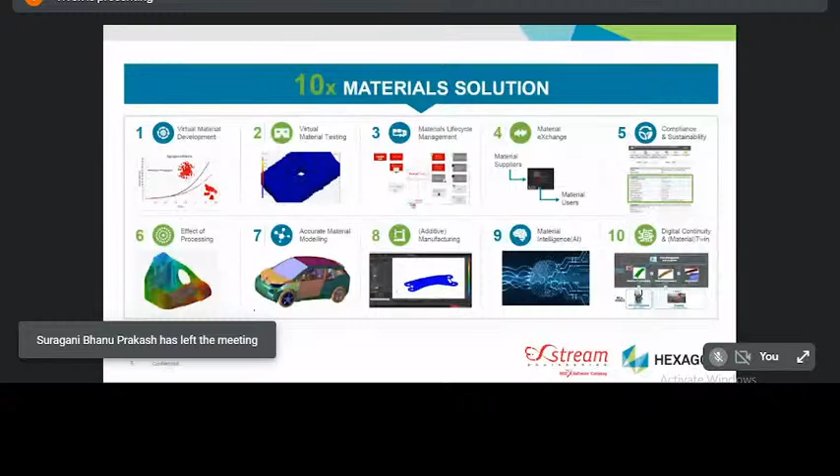So this will help the aerospace companies to reduce the amount of coupon testing. They need not test for all the required configurations. Most of it they can do by the software. Then a few critical configurations they can test on the actual machines. This helps a lot in saving time and cost in the material testing for aerospace programs.

For this also a few slides are there. These are all available ready-made. I will show it in the demo also, shortly. Then the third aspect is called materials lifecycle management.

What we mean by this is, if you take a large automotive company, they may have hundreds and thousands of materials that they will be using in various components. In the BIW, some material, in the tire, some material will go, in the engine, some material will go, in the rubber bushing, some material will go. Now, all that has to be stored in a very systematic manner.

So ideally some kind of online portal where somebody will log in and say, which product do you want to design? Which material options are available? Which material do I use? And then it will tell, okay, use this particular stress strain curve. And then there is more to that. Where did that property come from? Because somebody will say, I took it from here and did the analysis.

Then the product might fail and it will turn out that maybe that data did not match the actual component being used. So it is very important to record, where is this data coming from? Did the company get it tested? Was there an in-house test done? If the test was done, what was the specimen used? What standard was followed for the testing?

How many specimens were tested? Is there a statistical average? Or if we have taken from a data handbook, which data handbook is it referred? Is that properly subscribed, and which volume is it available for reference? Which recent version of the data handbook? Maybe the data handbook people itself updated the data in one latest version.

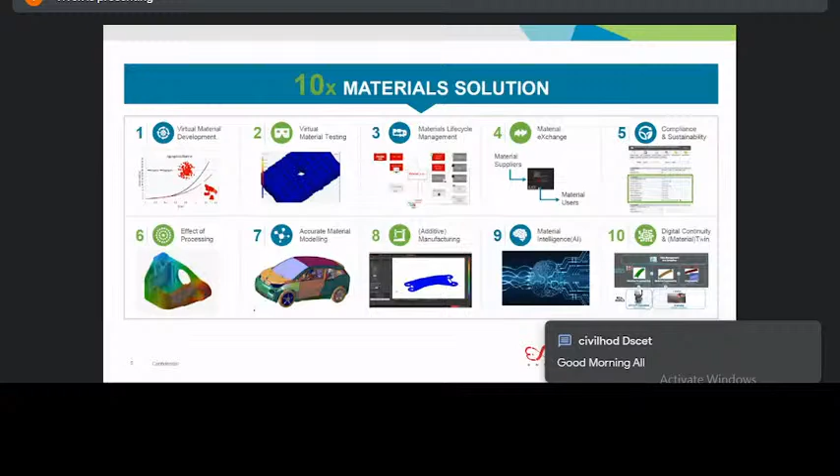They will seize all the shipment and say it cannot be used. And maybe they'll put a case against this company also, asking why you are shipping that, because it's a legal thing.

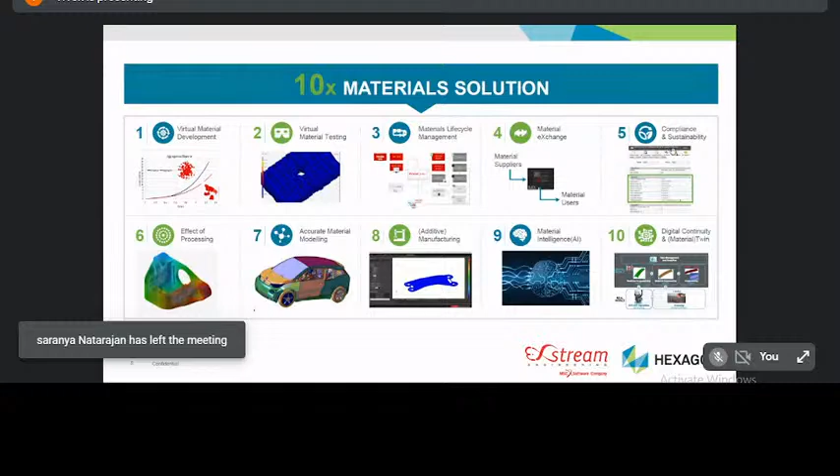So that compliance also can be addressed at the design stage itself, if we can say which product, which geography, which materials can be used. That is also available in the online systems which our company and other companies are developing for the end companies' usage basically.

Then effect of processing, like for example, if we take the case of injection molding, which is very common. There are several other processes similar to that, but this is a typical component. Hundreds and thousands of components we manufacture by injection molding, with several intricate shapes and designs.

Now, when we are doing that molding, the way the material flows inside the mold and then the way it solidifies has an influence on the end material properties that develop. Normally we will say, okay, this material means use this average property throughout the entire component. But that is not really the case.

Depending on how the mold is, somewhere it's very thin, somewhere it is not, some dead ends are there, some corners are there. There the flow will not happen fully in the other regions, and that has an influence on the properties getting developed in that region.

Maybe if there are some fibers, the fibers will orient in some manner in some direction, and in some other manner in some other direction. So this is, you can say, non-homogeneous and anisotropic.

Non-homogeneous means the mold flow itself is not happening smoothly everywhere. On top of it, it is anisotropic - if some fibers are there, depending on that flow, the fibers get oriented.

How do we account for this? What we do is like this: there are some simulation software which will simulate the injection molding process itself. There is a product called, for example, Moldflow. There are several other products which will say, given the die and the mold, and the material you are manufacturing by injection molding processing.

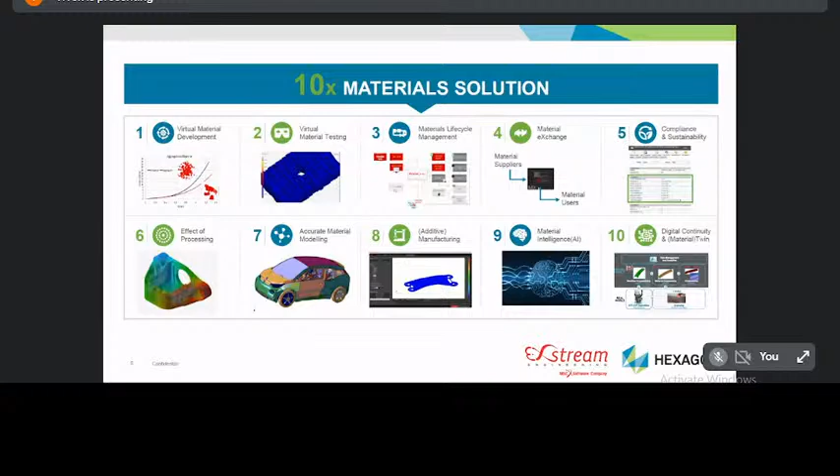Do you have any questions so far? More or less on the same things, I will be showing several use cases, examples, projects, etc. I will be showing these. If anybody has any questions, you can ask.

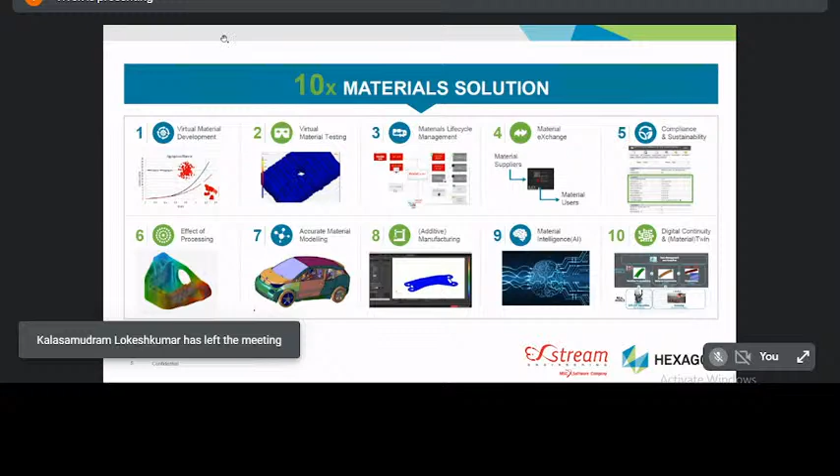Sorry, is it the free version or the paid version? That's a good question. We are providing both actually.

So if you see our website, this is our website. You can just type mscsoftware.com. You will see our website here. In this, there are a lot of products involved. Can you able to see my screen? Can one of you confirm? Oh, it's showing off. Are you able to see my screen? No sir, it's showing off. One minute, let me check that sharing once again. Where is that? That is here.

Now are you able to see? Yes sir, we can able to see now. Okay, so this is our website, mscsoftware.com. Easy to remember and type.

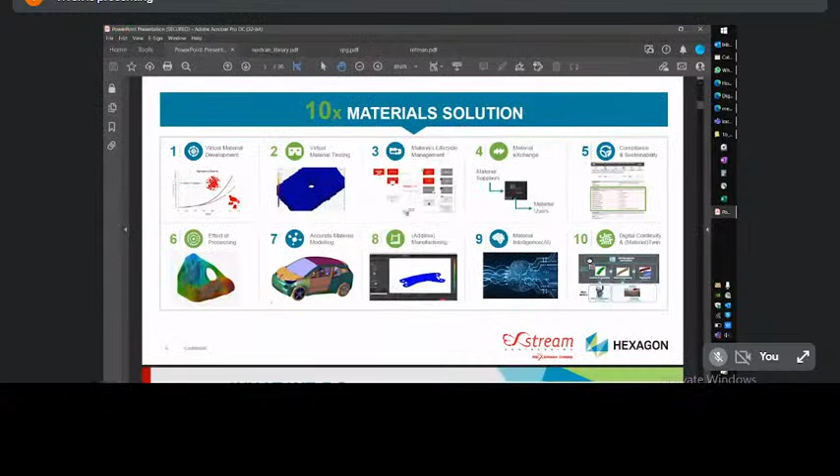Okay, I will continue further. So next is basically an elaboration on all these things for maybe another 5-10 minutes. By then my colleague Dr. Harish will be joining, and he will be demonstrating the actual product. Let me check once in case he has not. Okay, no problem. I will alert as soon as he joins.

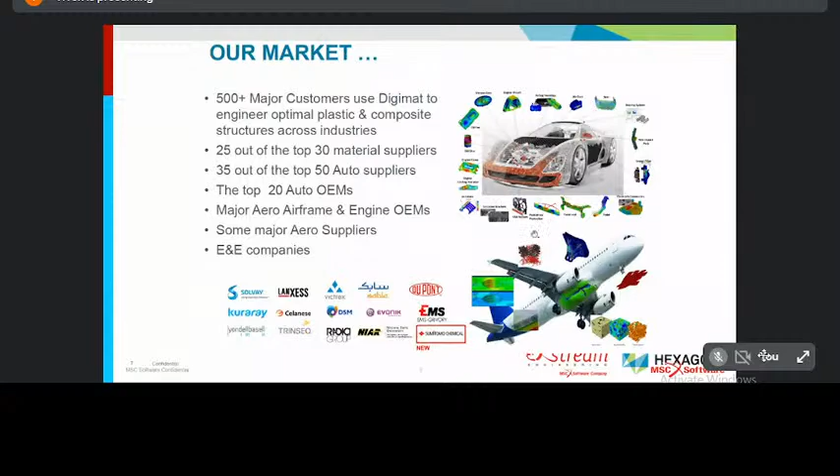And here we are giving some view. If we take a car, many parts of the car have composite materials, and there is scope to use this kind of technology to design the correct material properties for all of these applications.

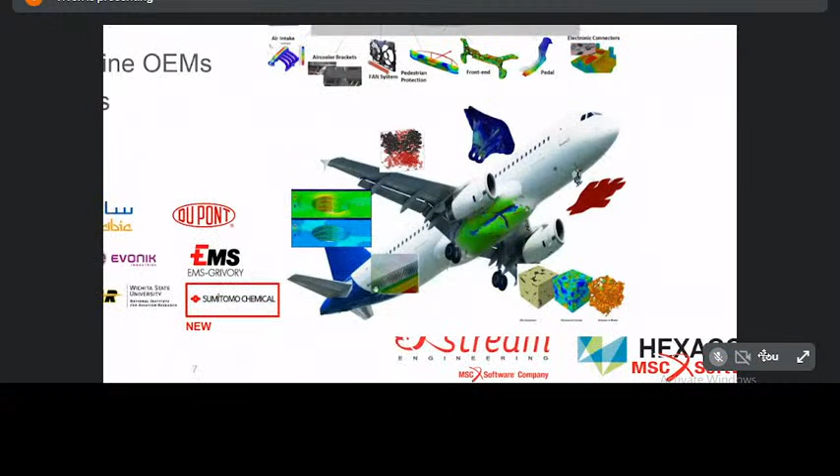It is being used on a day-to-day basis like that. Similarly, if we say aircraft, so many parts of the aircraft are on composites, and these technologies are used to predict the properties for a lot of these components and subsystems.

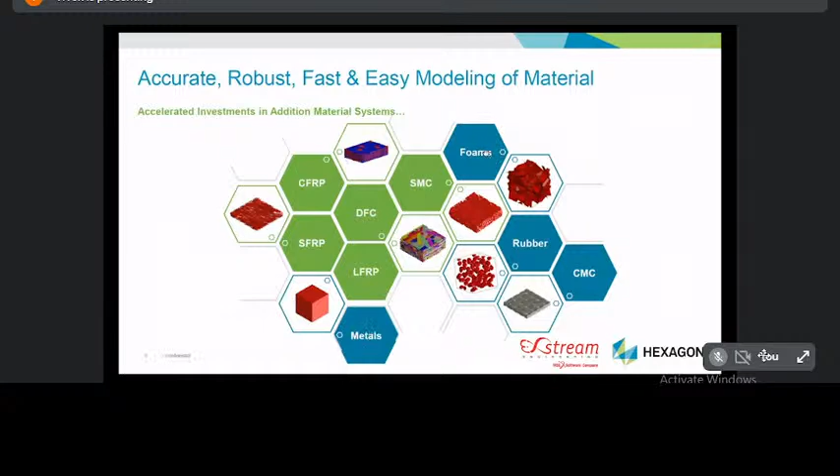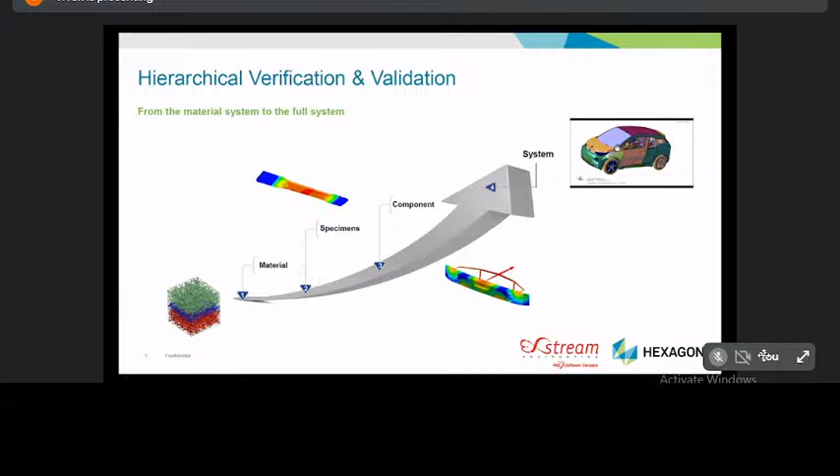Okay, again some general view of the same thing. Some material: CFRP, SFRP, DFC, sheet molding compound we say. SMC is another interesting type of material which is widely used. Metals also we can do. Then foams, rubber, and so on. All these materials can be worked on or designed. And so we start from the material and then use that material property with specimens first to verify how it is working. Then finally we will apply it on the full end component.

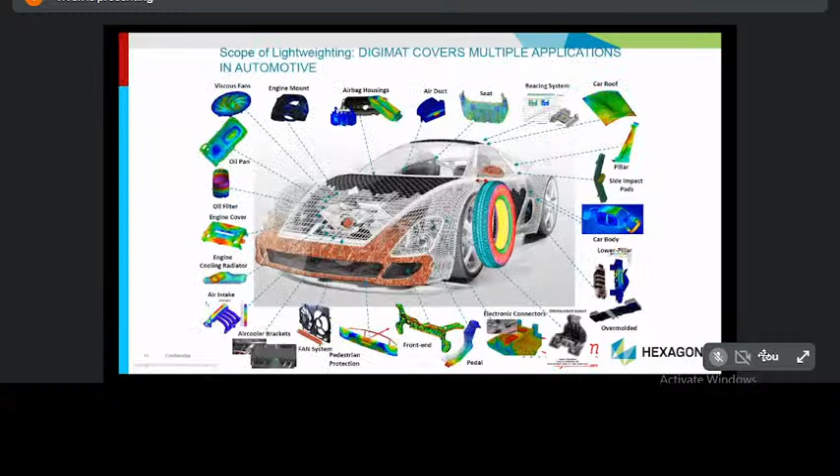And again, these are just general slides. I will skip further. This is the same thing, whatever I showed earlier, more zoomed in view. This whole presentation I will be sharing with you as a PDF. Today evening I'll share, and then Dr. Raja Reddy can get it sent to you.

Otherwise, normally what we do is we assume some average behavior everywhere, but the material is actually behaving differently. So if you say this is some yield or this is some ultimate, you can see a lot of variation is there. This we are accounting for in this multi-scale material modeling process. So same thing: the manufacturing process, then we import the manufacturing process detail. Then with a tool like Digimat, we calculate the different stress strain curves, and then the final performance using the appropriate data.

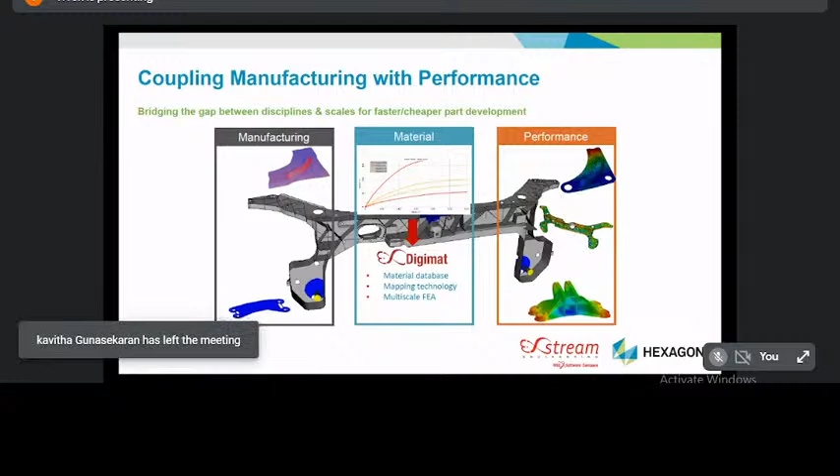Okay, again, some more details. So I said process, but it is not just injection molding. So many processes are there. These are some of the software used. For example, metal forming could be there. We have Aniform, then Magma. So many tools are simulating so many processes.

For example, we even have some scanning processes. That means I take some component and I will do a scan of it, like an X-ray. Now imagine you take an X-ray of multiple sections of that component. This is an industrial scan, which is much more accurate. It will take those multiple cross sections, put them together and create a 3D geometry, a 3D representation of what is inside as well. Whatever void is there, whatever orientation is there, it will capture that.

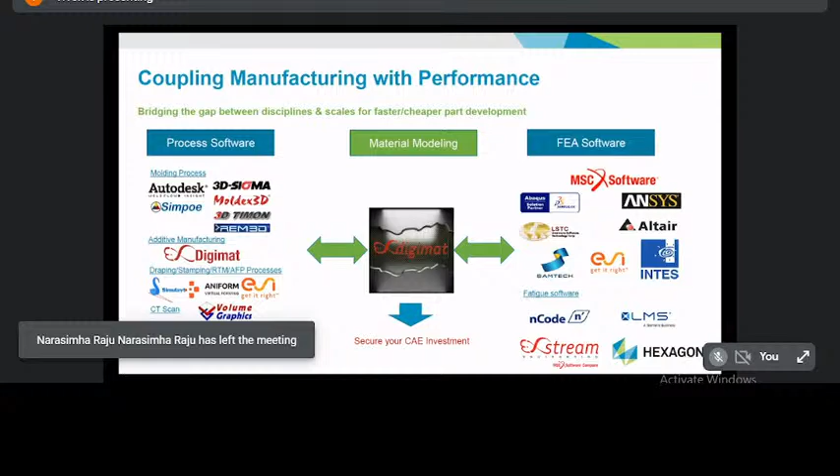That kind of data, again, a tool like Digimat can read, and it will calculate the property based on the specific imperfections or whatever fiber is there. That kind of thing is also available. So practically from a wide range of simulations, we can read in the data and account for the correct variation of material properties. It is no longer just one Young's modulus, one Poisson's ratio. It is now varying from position to position depending on whatever process that thing

has undergone. We calculate all that, then we map that onto practically any software. This technology as such is independent of software. We can use whichever process simulation software we have, and whichever simulation software you have. These are most of the available solutions in industry.

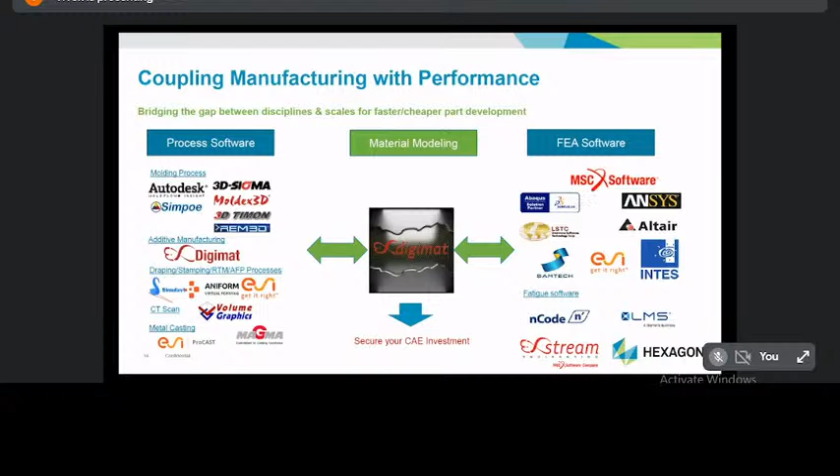This tool like Digimat will map the process from any process simulation to any finite element analysis software, and we can do the further analysis. This kind of technology is available and being used in the industry. Again, same thing, we will elaborate on that.

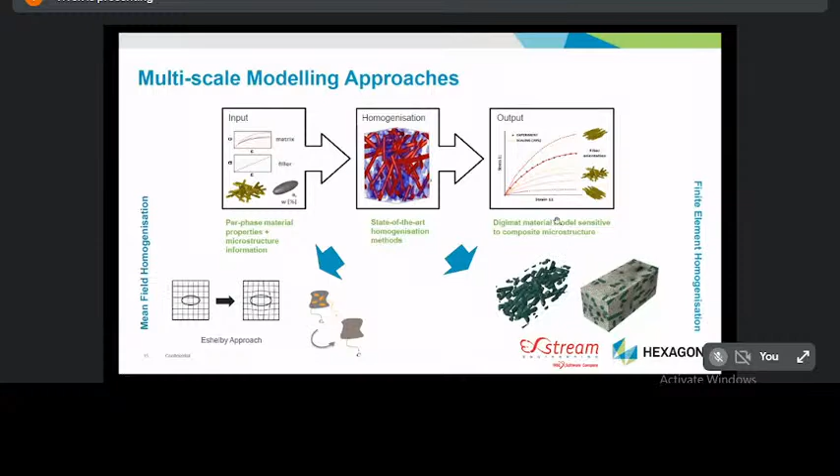So you could have the matrix, you could have the filler material, and then the orientation, and then we have things like volume fraction and so on. With the different combinations of this, there are homogenization methods, different equations are available. Then it will predict that if the fiber orientation is like this, this is the property. So depending on the fiber orientation, you will get some appropriate property. We can visualize this, and this will get mapped onto the structure.

Calibration we can do. Whatever we predict, what is the guarantee that it is working correctly? One specimen you simulate with all this technology. Then you simply take one actual specimen made by that same process and do the testing. Then compare those two. Plenty of comparisons we have done, which is verification that this whole method is working.

And so these are the kind of software. If you open the software, you will see that so many materials are there. A wide variety of industrial materials and configurations. We have the data for all this. These are the individual constituents. This is when we say short chopped fiber. So many types of fibers we have the property for, practically.

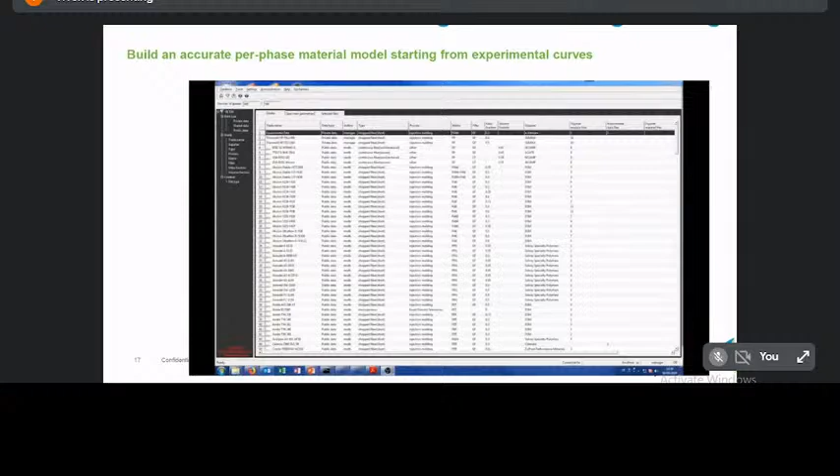We have tied up with practically all of the material manufacturers. So we know that if they say chopped fiber, they will be using one of these only. So it will take the property from here. All we need to know is the volume fraction, the orientation, like that. Then it will put together and calculate the global property. So the experimental curve of each of these individual constituents is available inside the software for the end user.

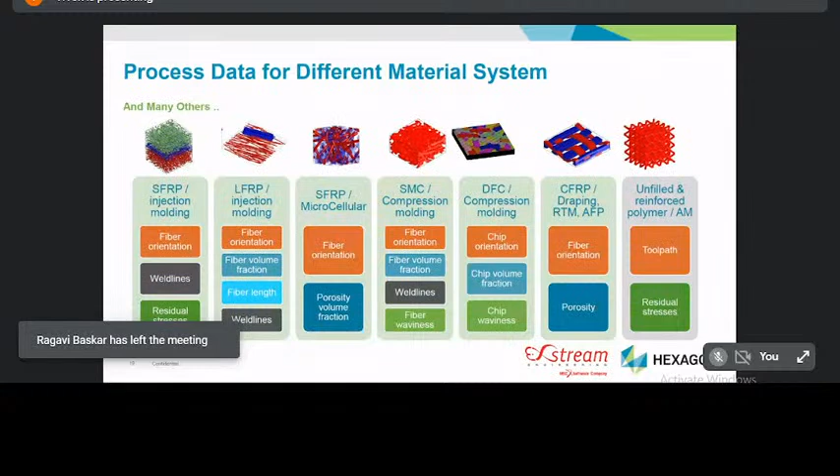So again, just to mention, so many types of things are available. For all these kinds of material, knowing the micro property and accounting for residual stress, weld line, fiber length, porosity, we can predict the end macro property that component will have and use that property in the final simulation or design, so that our simulation is correct and more realistic.

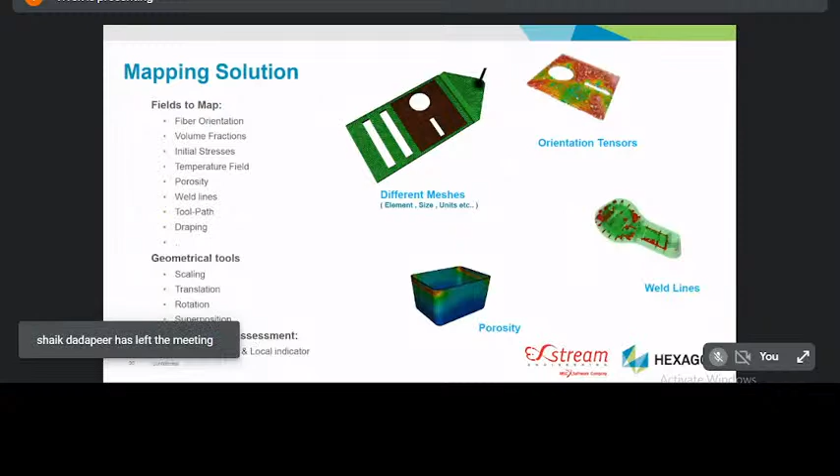Mapping solution. Mapping means from the molding onto the mesh, because the mold flow or injection molding simulation wants the mesh in some manner, and our finite element stress analysis has the mesh in some other manner. Sometimes something is in 2D, sometimes in 3D. The region of space will be the same, but the meshes will be different. Sometimes units may be different. But in spite of all this, we should properly transfer the material information from one mesh to the other. That is called the mapping solution, which we are able to do.

Just give me a minute.

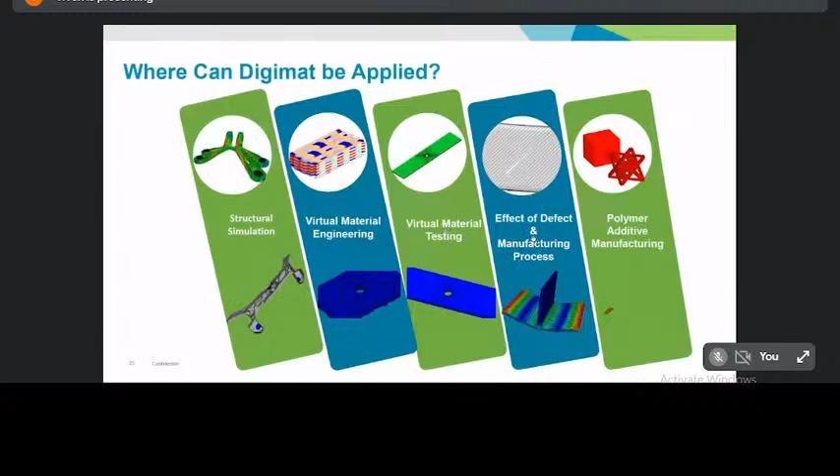Okay, sorry, continue. So this is again the same view of multi-scale modeling. At each of these places, there is a different orientation, different stress-strain curves. And so structural simulation, virtual material testing, effect of the defects and manufacturing process, additive manufacturing, these kinds of things.

And now some industries where they have actually used it day to day in India and globally, we are showcasing that. So Faurecia company, they manufacture several kinds of components. In India, they have multiple design centers, engineering centers. They work with Solvay. So usually there is an end component or end system designer, and then there is the material supplier.

They always work together within this technology. So they work with Solvay, and they have used it for several applications. Some of them you can see here, injection molded composites. Finally, the aim is 30 to 50% weight saving.

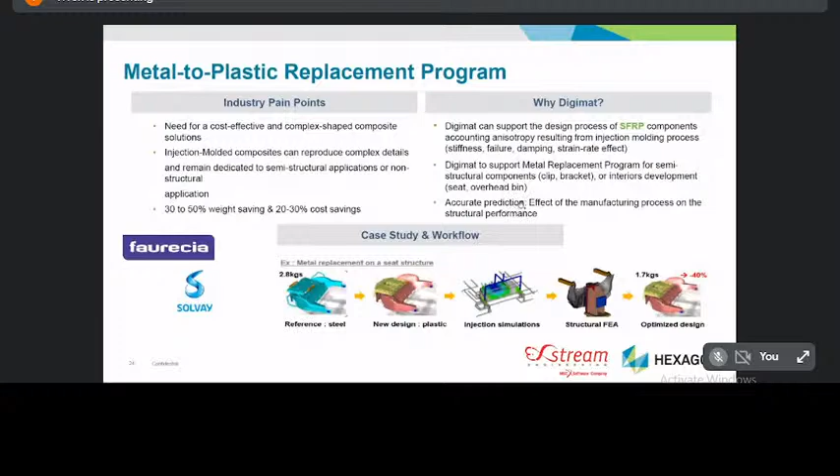And our simulation is much more realistic. So we thought it would behave something like that, but now it is behaving like something else. We are able to do the accurate prediction. Okay, this is one of the main aspects of it. So for example, Faurecia seating systems is there. That is one of their units. So whatever you can say, the metal to plastic replacement, we say. When we say plastic, we mean composite material.

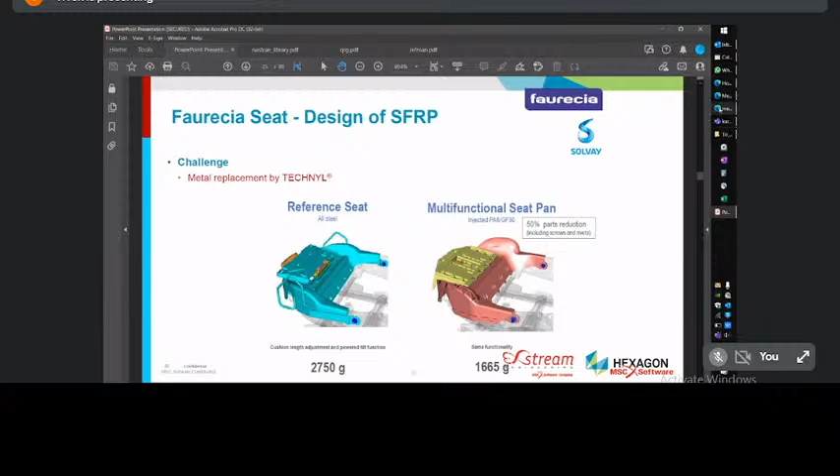Okay, so this particular component, just give me a minute. Just give me 1 minute. One call is coming. I'll just check what that is. Problem? Yeah, sorry, I'm back. Sorry. So, okay, sure, so we continue.

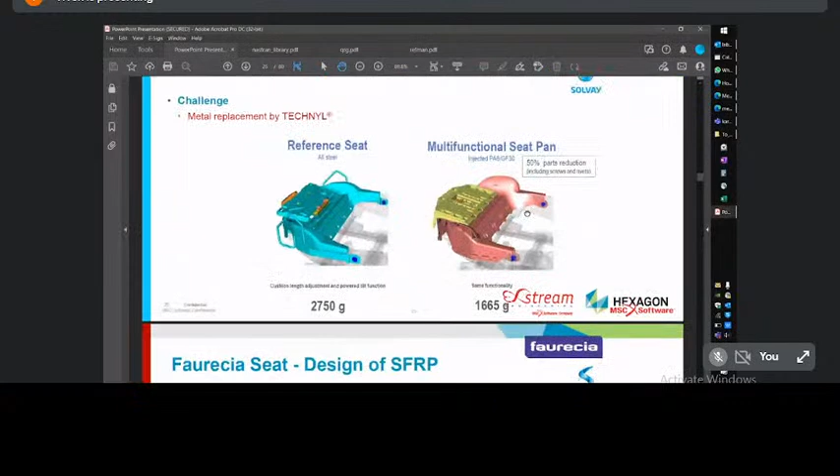So these are like the metal to... okay, these are now 1.66 kg, and metal is also being avoided. Okay, and they are simplifying the design also. When they do the injection molded part, you can combine multiple parts to get one integrated part. Okay, so the assembly also becomes simpler, like a 50% part reduction. All these are sort of done together.

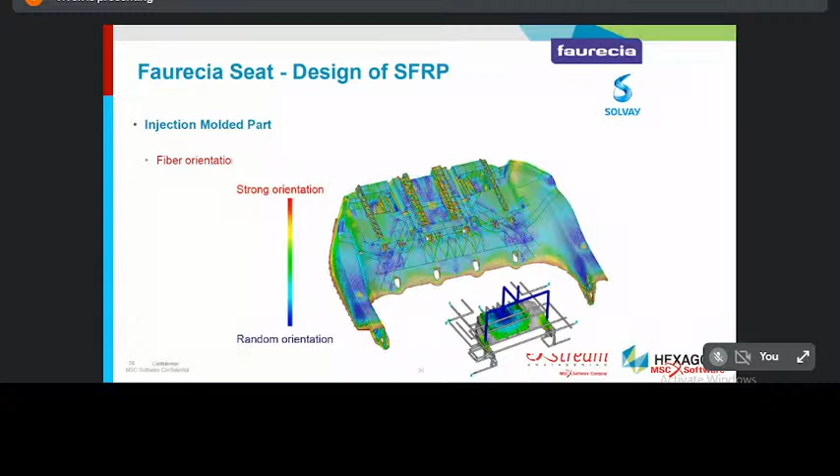And now the main thing is which material you can use for this, so that it will have the same strength as that of the original part. Okay, so that is what is being done here. Several views of that. When we do the analysis, this is the orientation of the fiber. Some places it is randomly oriented, some places it has strong directionality. This depends on the process parameters. We are simply reading from the process, then calculating the correct material properties and using them in the design.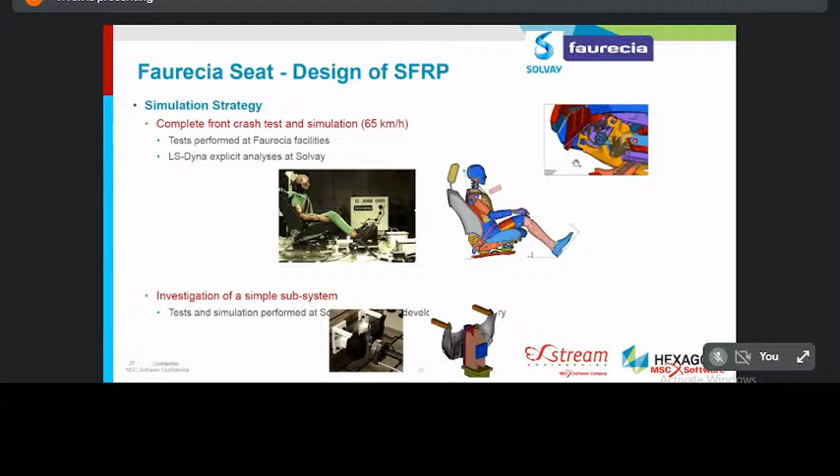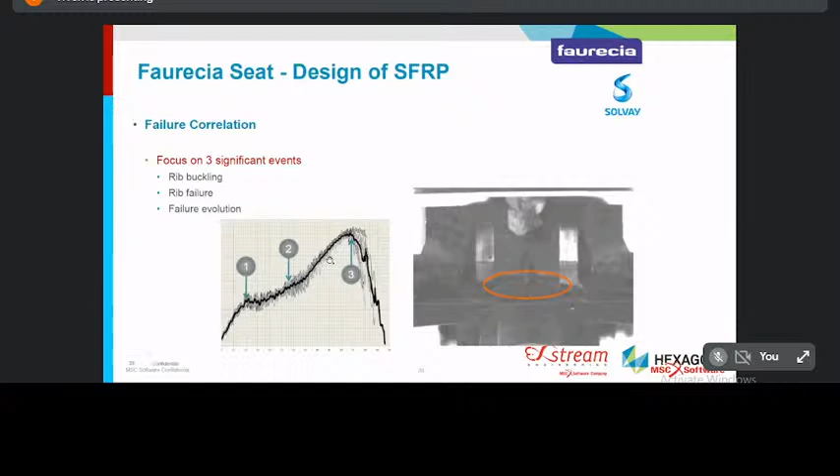And so here again several things. For example, these kinds of systems here, which are holding these seats and so on. You can see the part shown here. So correlation with the test. Finally, they will do the test, some load versus deflection or stress strain, they will match and say that it is matching well, which means this whole process is working okay. Those kinds of verifications are available.

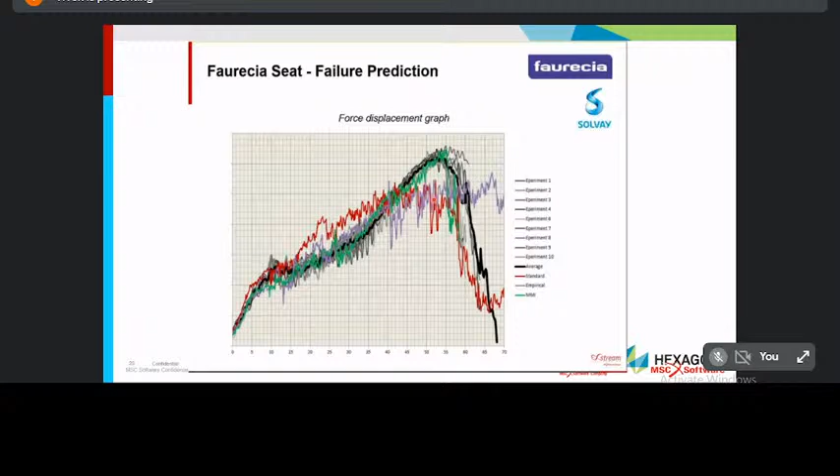This is again multiple experiments they have done, force versus deflection. So these are verifications. You do a test, you see the force versus deflection. And similarly, reinforced plastic. For example, this Valeo company has done that, in the case of this vehicle engine cooling radiator. So this part, they are making with this composite material, and ensuring that it is working okay.

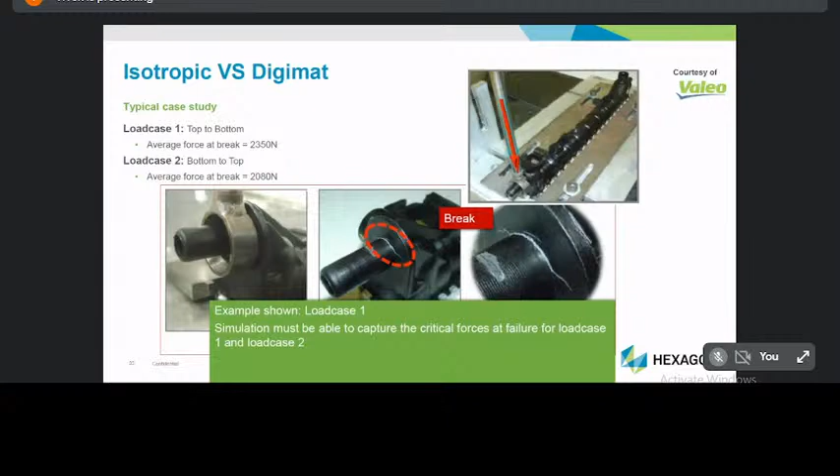So isotropic versus Digimat. Normally they will assume that it is an isotropic property and they will do the design. Then it turned out that it was failing, because that part was not actually behaving like an isotropic material. Then they did all these simulations of the material properties, got the updated properties, accounting for all these aspects which I am telling, and with the updated material property it is working properly.

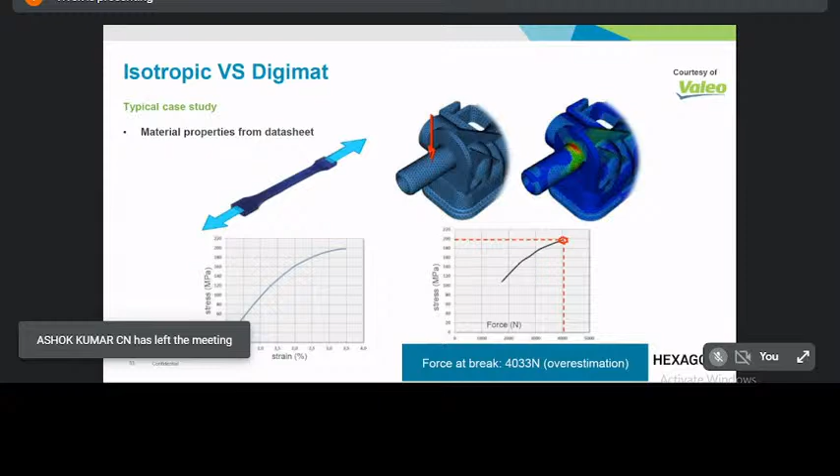So earlier they took the assumption of isotropic property, did the analysis, and the design was not working. With updated properties coming from this multiscale modeling, accounting for the orientation, the distribution, etc., we get a different material property. With that, the component is now working and not breaking. This is the company reference from Valeo. Valeo is again in Chennai.

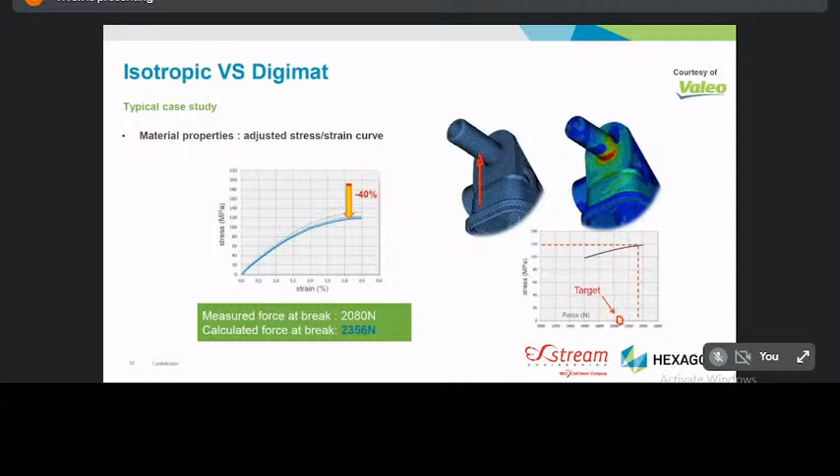They have got large engineering centers doing mechanical engineering work, and they are using technology like this. So they are comparing that. What does isotropic mean? It is an assumed value, and then with this materials engineering, we get the better behavior.

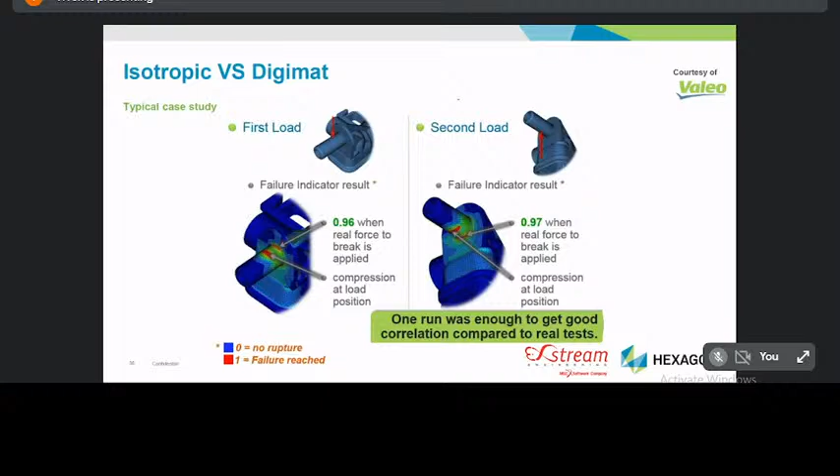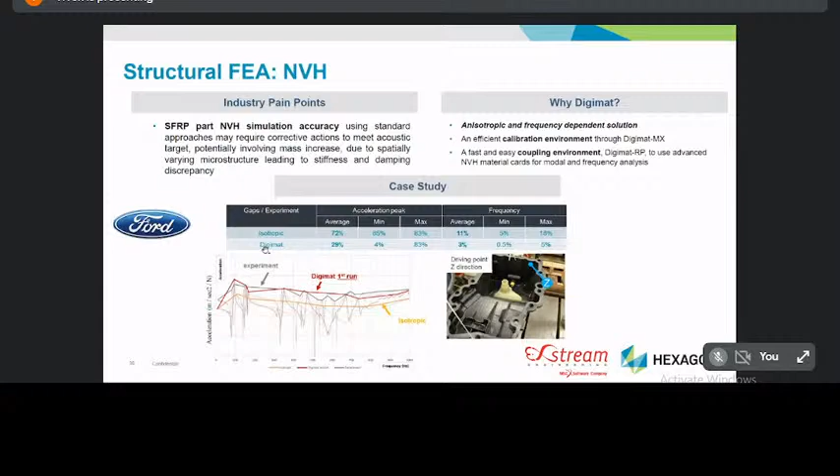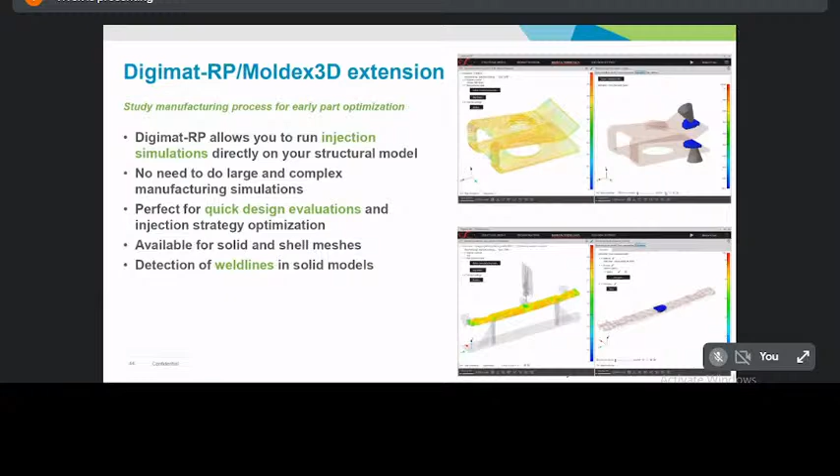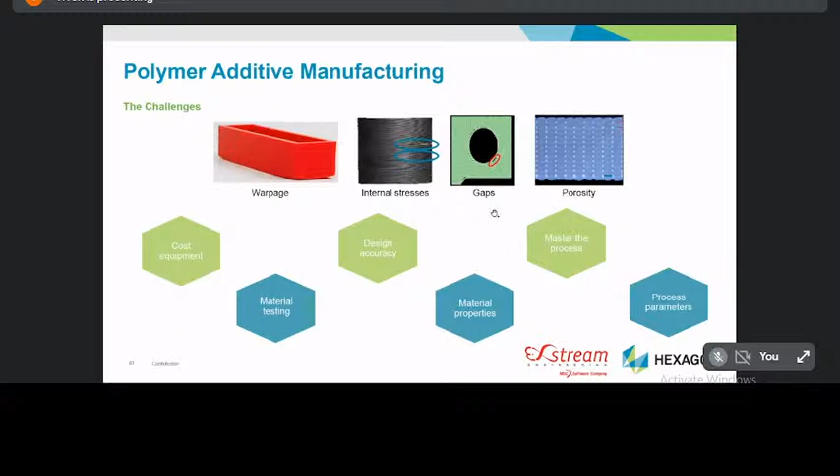So this is for additive manufacturing, like I was telling. So why is additive manufacturing simulation important? Because there will be warpage, there will be internal stresses, there could be some gaps, there could be porosity. We have to account for all these things in the material behavior. One is the additive manufacturing process parameters themselves. Apart from that, we should choose the material suitably so that all these challenges and defects are minimized. For that, we are able to design a better material. This material will go into the 3D printing simulation, and then we verify that the process is happening properly.

We are working with others; Stratasys, for example, is one 3D printing company. Then Bosch, DSM, all these companies are using 3D printing and these kinds of technologies. You can see here, and Harish will cover this further. FFF and SLS are different processes. For example, we can do topology optimization, although it is not directly material.

In additive manufacturing, there is now no constraint on the shape. Earlier, if you had to cast or extrude, the shapes had to be particular shapes. You could not manufacture arbitrary shapes. But now with 3D printing, practically anything can be printed, with suitable support structures. So optimization can now go to arbitrary and even weird shapes, and it will still work and can be printed. So topology optimization is a big thing. Then fiber orientation, process simulation, part performance, and part inspection. We are offering the methodology for those kinds of things.

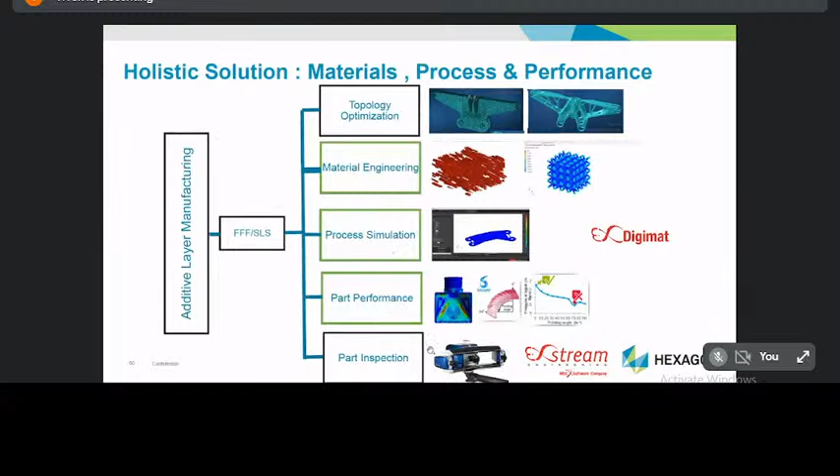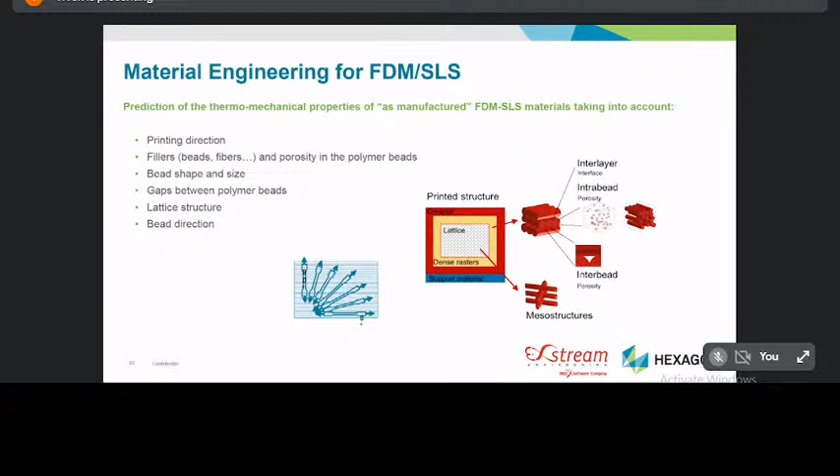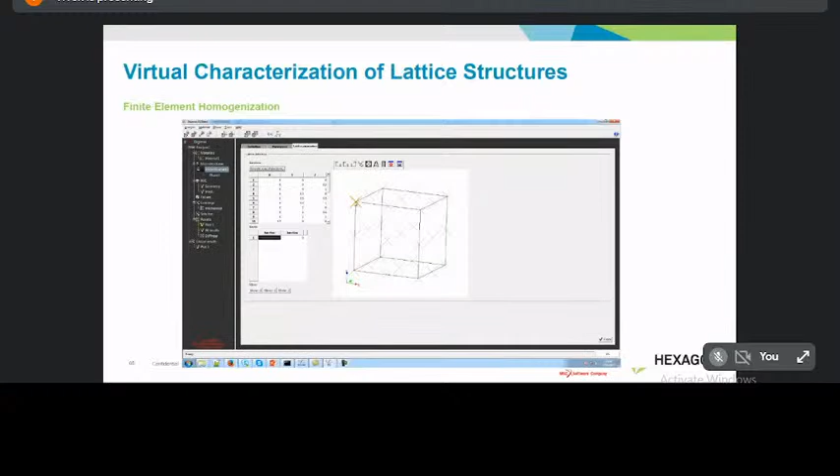Again, a reiteration of the same things we do. Which are the types? For example, FDM, SLS; for more and more processes we are able to define the material characteristics. Then, for example, visualize. These are some more screenshots of the software. We can visualize these lattice structures. Then virtual testing, like coupon testing, we can do.

Now these are the materials used in 3D printing. We are getting that data directly from the material suppliers. This is still from 2019; now we have much more. Solvay is a company which develops materials for 3D printing. Those characteristics are in our software, so you can use them in the simulation and ensure the design is correct. That means we know the property at the end of 3D printing if you use this material, and you can calculate and simulate from that.

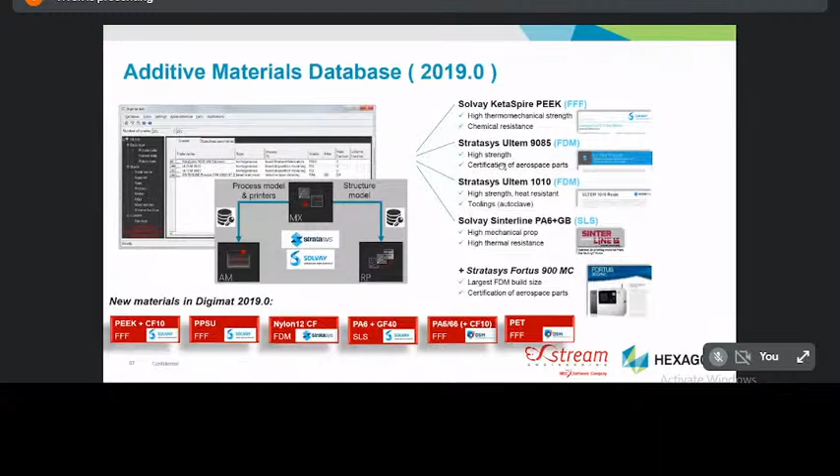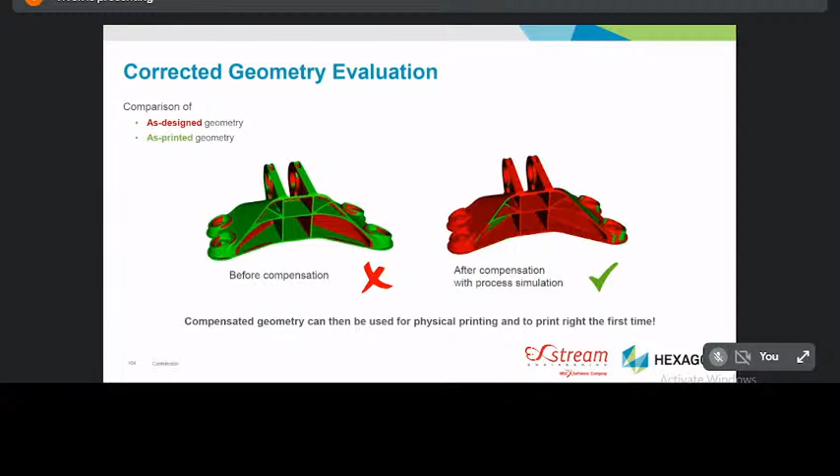Again, for example, effects of warpage and warpage evolution. Here there is something called the compensatory offset. Because of the 3D printing process, some warpage will happen. So we make our initial shape with a slight curvature in the opposite direction, so that after the warpage actually happens, you get the correct shape. That is called the compensatory offset. Those kinds of things we can design and account for. There are several examples of that.

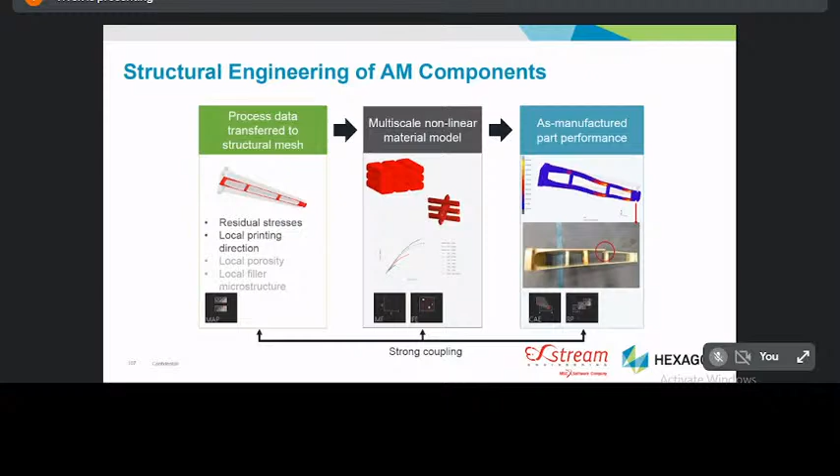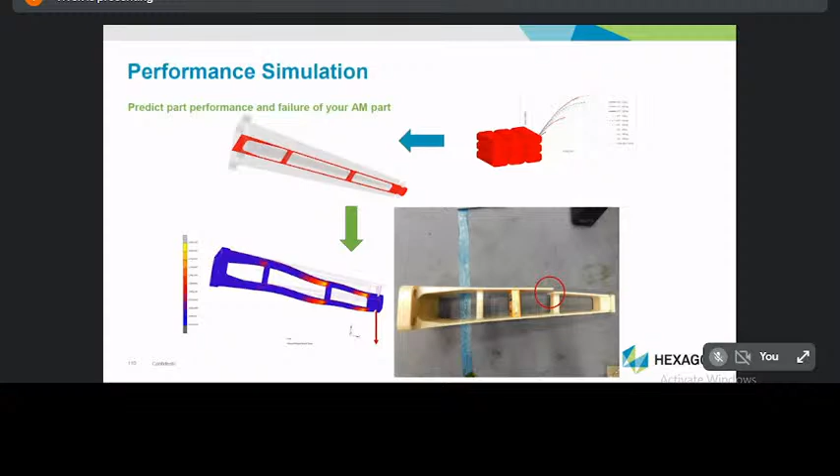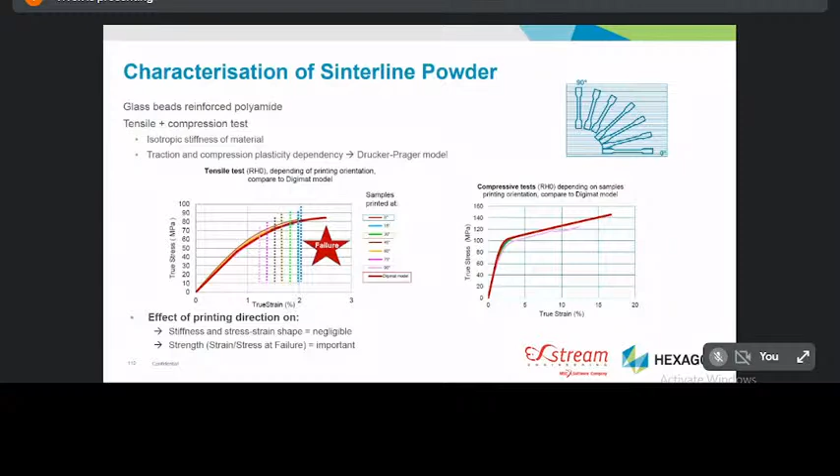And again, part performance: we take a better material property to ensure it is not going to break. Effect of microstructure: which type of microstructure, and how it influences the macro properties, we can visualize. Here are some failure investigations and failure simulations we have done. Some more examples, like a cooler application. Then sintering processes; the powder used for that, we can simulate its behavior. These are screenshots of similar warpage compensation, and some tests we do to check that.

So that's the brief summary. Basically, for practically any materials application, study the end properties you want. From that, we can design what kind of micro properties we need to ensure we get the correct material. If there's a process happening, take the process effect into account, then update the correct material properties on the simulation model so the simulation is much more realistic. This is used widely in the industry. That's the brief introduction. Any questions, you can ask me now. If not, my colleague will start with a demonstration.

So I will just stop sharing for now.

Harish, can you start? I'll give a brief introduction and you can start maybe. Yes Vivek, yeah I will start it.

So I'll just briefly introduce you. Once again, to all the people present: Dr. Harish works with us. He's specializing in materials engineering. He joined us a couple of years back. He completed his PhD from IIT Madras, and his area of work is in the area of mechanics and materials and so on. He is focusing dedicatedly on materials engineering. He works with all those companies and projects which I mentioned, and has been part of those kinds of things. He will give a demonstration of the actual software - how it looks, what is the input, what is the output. Harish, you can take about half an hour to 45 minutes, and in between keep asking some questions, pause so that they understand the things also.

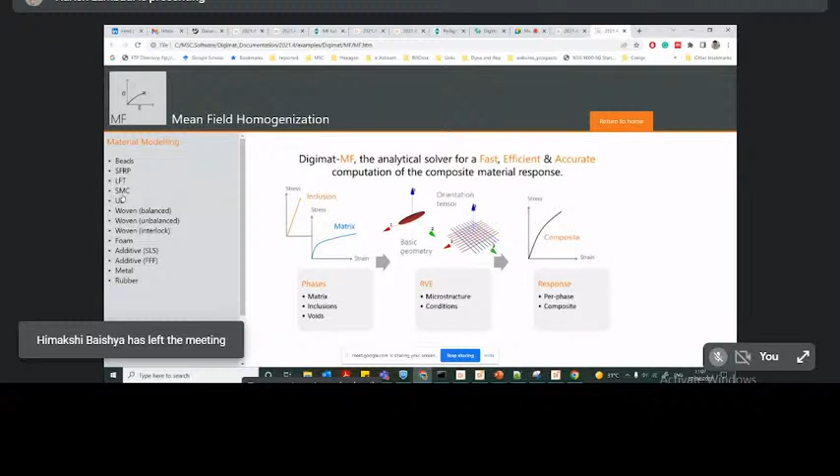SMC is another version of the injection molding way of processing. UD composites means unidirectional composites, where long fibers are aligned in one direction in the resin. That's the UD composite. Like that, there are woven composites, foams, and additive materials like SLS materials and FFF materials.

These are the two subparts of additive manufacturing which Digimat supports: selective laser sintering and fused filament fabrication, or fused deposition modeling. In metal and rubber also, you can see composite style materials under metals and rubbers.

So it's not limited that composite means only a single type of process or single type of composite. It's like a different one.

So now let us go into the agenda. What will MF do? MF is actually an analytical solver, and in the back it uses continuum mechanics equations derived from literature by scientists. It is very fast, efficient, and accurate to compute composite properties when we give inputs like individual matrix or resin properties, inclusion properties, and inclusion geometric attributes.

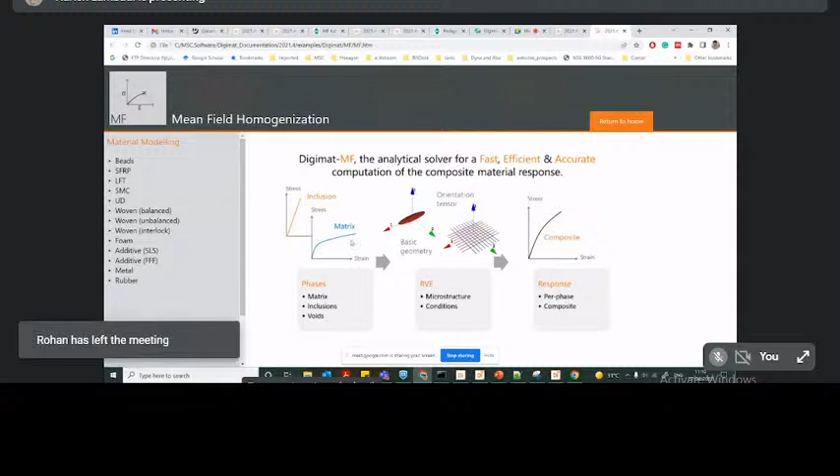So now I will go into the demonstration, and I will add the inclusion properties, matrix properties, and inclusion geometric attributes, and I can run the analysis and show you the composite properties.

Before that, you may see a small tutorial in Digimat MF. This will allow you to understand how to add the analysis. You can add new analysis like this, and when right clicking and adding, you will get tree kind of graphic user interface like this.

After that, you can click on materials and right click to add different phases of the materials. The first phase is the matrix resin phase, and the second phase is inclusions - either voids or inclusions like carbon fibers, chopped fibers, or anything you can call an inclusion.

Once you have added, you can add microstructure - I will show that - and you can add the RVE. I will explain what RVE is. Under the RVE section: failure, loadings, and finally we can see the composite performance under the results while performing step by step.

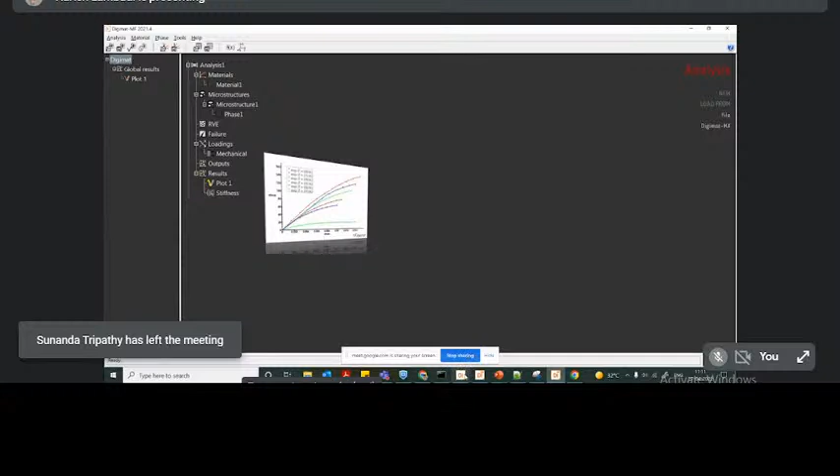So let us go into the Digimat MF. When I'm clicking this one, I'm able to open this MF2. And just in parallel, let me explain this one as well - this is another one, Digimat FE.

The agenda of Digimat FE is the same as Digimat MF, that is to get the composite properties of the matrix of the composite. So when we are adding the individual properties, it will give the composite properties.

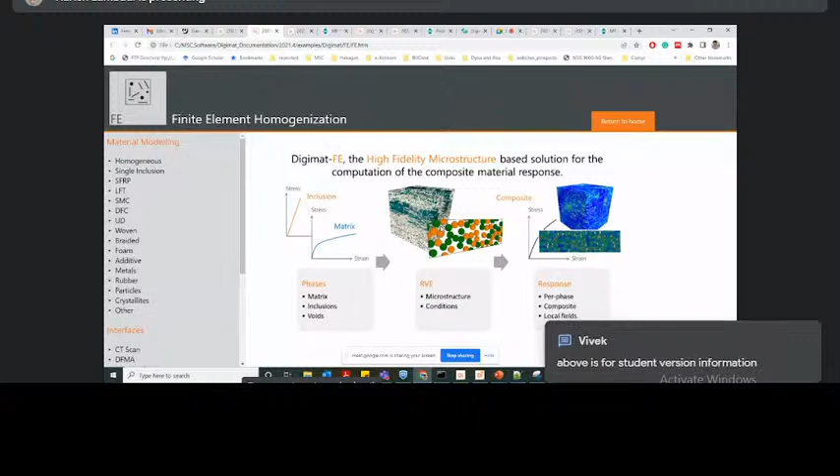But here for FE, Digimat FE means finite element homogenization, or a full field homogenization, where we try to explicitly model the RVE - representative volume element. We explicitly model the fibers, explicitly model the resin, and explicitly model the orientations, and we submit the analysis to the finite element software to run the analysis of the RVE and get the composite performance.

This is a little time-taking process, but it has some advantages over Digimat MF, which researchers and scientists are looking for, and some industry R&D centers are also looking for.

So the agenda of the two, Digimat MF and FE, is the same, but the approach is different. In this one they go with the approach of solving analytical solutions, but in this one they go with the approach of doing simulation on the RVE and getting the composite properties.

So I will go briefly through Digimat MF and show one demo on this one. And with this, I think if you have some doubts, I can try to clarify that with respect to the demo.

So when I'm opening this one, it will be shown like this, and I can add the analysis here. So I have added the analysis now, and in Digimat you can do different analysis types - not only mechanical, but also thermomechanical, thermal, electrical. At this moment, I will choose the mechanical one.

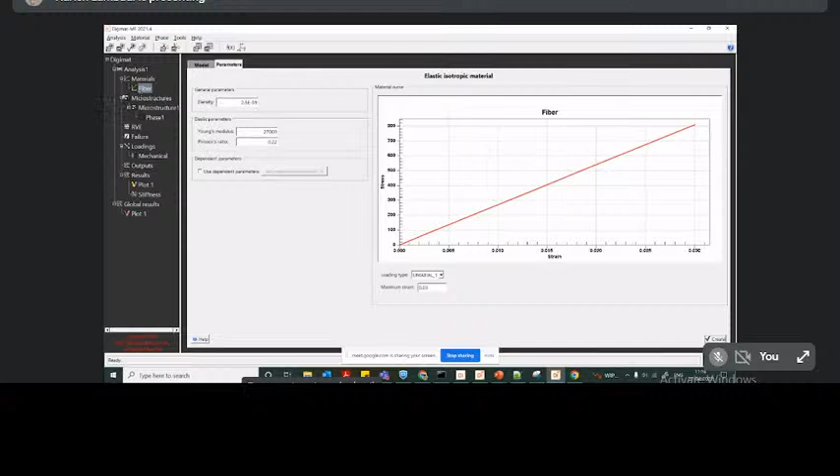So if you are giving this at this moment, the corresponding material stress-strain plot can be visualized on the right side of the user interface. So when you're clicking 'create', the bright one will be changed to the dark one, or the dark one will be changed to bright one - that means the section was assigned correctly.

Let me go into the materials again and add another phase. Another phase means - let us say now I have added the fiber material, and now my fibers are filled in the matrix resin. So I'm trying to give the matrix properties now.

So I'll give this one - usually the matrix will actually go beyond the elastic region, and it will go into yield. It will yield, and it will show some plastic region, and even it will fail after some elastoplastic scenario regions. So for the matrix, most of the time it is going to be elastoplastic.

And I'm giving the elastoplastic properties, and the popular plasticity model is J2 plasticity, and I'm using this hardening principle, exponential linear law, and I'm not changing these things.

Let me validate this, and I will give the material properties corresponding to the matrix in the parameters section. So here I'm giving 1.1 - the density of the matrix is 1.1 minus 9.

You can give the Young's modulus. Once you are giving Young's modulus and Poisson's ratio, you can give the yield stress, these things. You may have a question: where do you get these parameters? You will get these parameters specific to the matrix, maybe generic properties, not exact properties, from the internet. You will take those generic properties, first create a generic material card, and bring this one to a high fidelity, or let us say improved, material card.

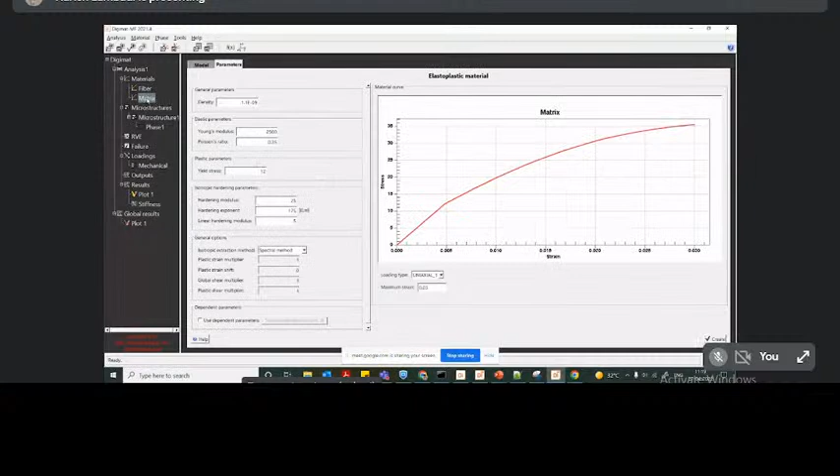So now I'm creating this one. Once I create it, I can see that it is created. So fibers and matrix are added to properties. Now let us go into the microstructure. Microstructure means here either fiber composite, fiber microstructure, or anything. Let me go into this one so that you will understand.

If I'm going into the microstructure, you can see that any kind of microstructure type can be added, not specific to just fiber filled. You can even add lattice kinds of microstructure for additive manufacturing processes, woven kinds of microstructures, and even sheet molding compound microstructure, etc. At this moment I am going for the generic. Generic means either voids or fibers filled in the composite, that kind of microstructure.

So in the microstructure, I need to give the phase each time. Let us say for the matrix phase, I will go into the matrix, attach the specific matrix properties, and give the phase name, I will say it's resin. So I have added it, and let me add one more phase. This one is fiber orientations, I will say fibers. Phase name is fiber. The phase type is either inclusion, voids, or continuous fibers.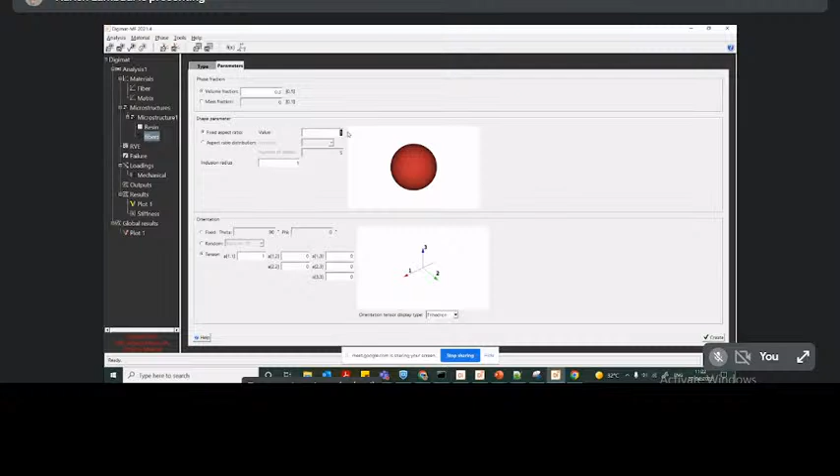Sometimes when you have glass beads, circular beads, you will give a value of one. One means it is actually circular. Most of the time, fibers will be around 20 to 30 aspect ratio. Then you can give an aspect ratio of 20.

So let us have a little explanation on this orientation tensor. What is this? Orientation tensor means how the fibers are aligned in the matrix. If you see in this one, sorry, if you see in this one, the fibers are aligned in this matrix in which direction? Is it along the longitudinal direction, or in the transverse direction, or random directions, or some percentage probability, 80% of the fibers aligned in one direction but 20% aligned in another direction, like that.

That will be described by simply giving the orientation tensor under the orientation tab. That's the meaning of the diagonal elements. You don't need to touch the non-diagonal elements; you can keep them as zero. If you say 1, 0, 0, that means all the fibers are aligned in one direction. But if you say 0.33, 0.33, 0.33, that means all the fibers are oriented in all directions equally. So it is like showing the probability here.

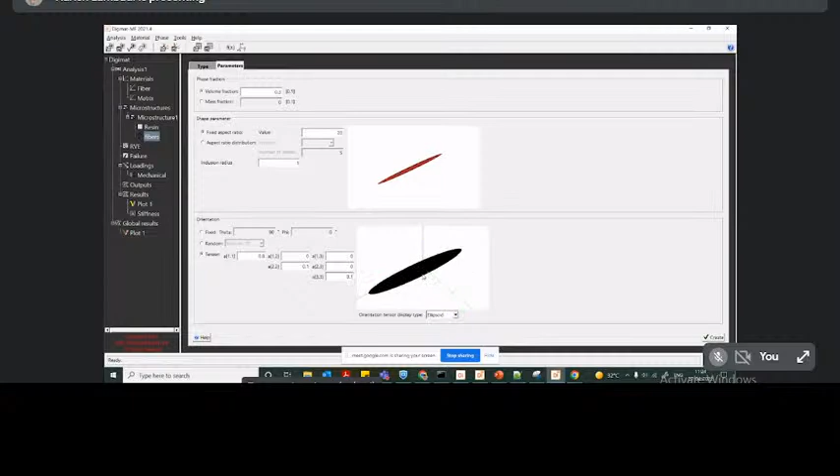If I'm saying my fibers are oriented 80% in one direction, 10% in another, and 10% in another, that means only 80% of fibers are aligned in one direction, and 10% and another 10% in the other directions. So this is how we give the tensor orientations, and you can create with this one. Once you have created it, you can go to the RVE, representative volume element. Here the RVE means representative volume element through thickness.

For injection molded components, when they are injecting through the injection gate, through the thickness the fibers will be aligned in different directions. We can describe that using a multi-layer analysis: we add each layer and describe the orientation tensor for each layer. We can add many layers, like 5 or 10, to describe the orientation tensor through thickness. But at this moment I want to use only a single layer corresponding to the microstructure given under the microstructure tab, so not multi-layer.

I'm going to the failure. Here we can proceed further without failure as well, but you can add failure also. I can add one failure here, and these things also. I am giving like this, activating this, and let it be the default settings. If you want clarification of any options, please let me know. I'm happy to explain it after the session.

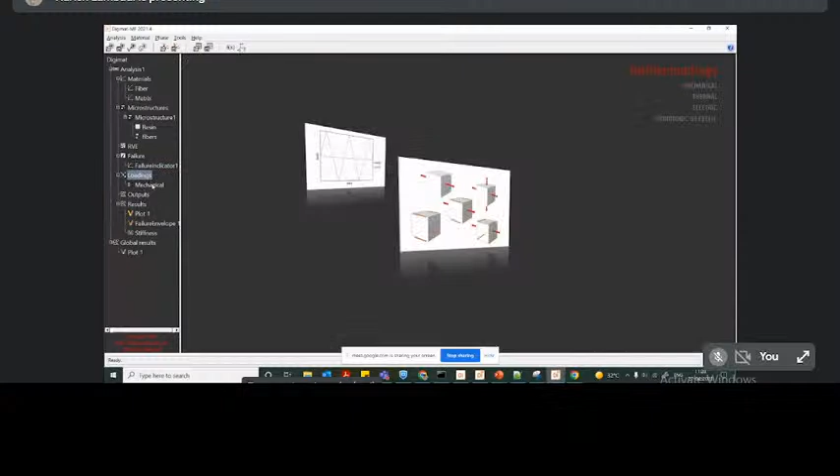So now I have defined the failure indicator. It is typically the 3D transversely isotropic. Most of the time we use it for short fiber composites, but it's not limited to this one. We have many failure criteria you can use specific to the material type. Now I'm going into the loading and giving one loading. For this analysis I want to give axial loading and check how my composite is behaving. My peak strain is 0.03. Let it be like this, and let me create this one.

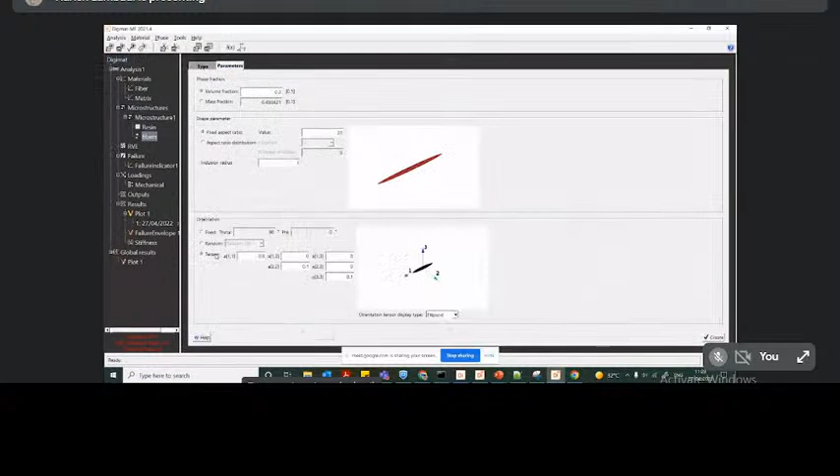Now all the blocks are completed, and we can see all are in bright color, meaning all are assigned correctly. Now I can run the analysis by pressing F5 or clicking this one. And you can see the stress-strain plot, specific to these fiber orientation terms, with loading in the x-axis along the fiber direction.

Let us say I change this to 90. That means I am now loading the RVE perpendicular to the fibers, where 80% of the fibers are oriented in one direction. You can understand now that for 90 degrees the stiffness and strength are very low. This is how we predict the material; it is anisotropic at every point in the part. Some locations may have 45 degrees or some other angle. Let us say I give a 45 degree angle, validate.

So what will happen is it will show the stress-strain plot for the 45 degree angle, and not only the stiffness and strength, but the failure will also be different, and it will capture the failure correctly with respect to the composites.

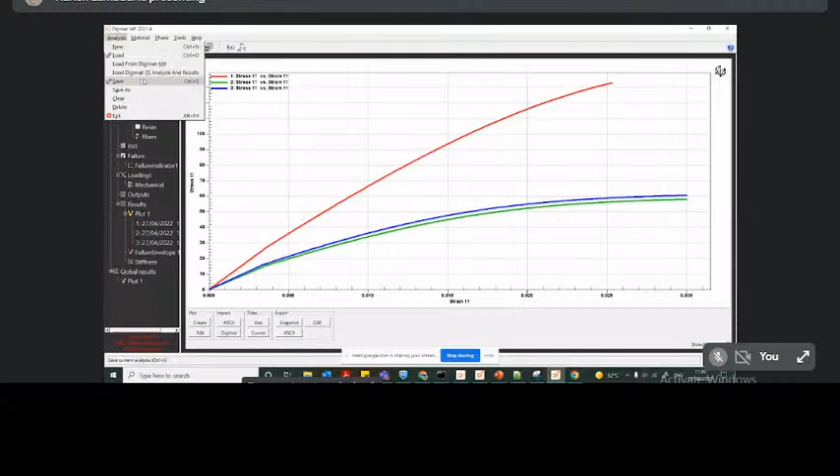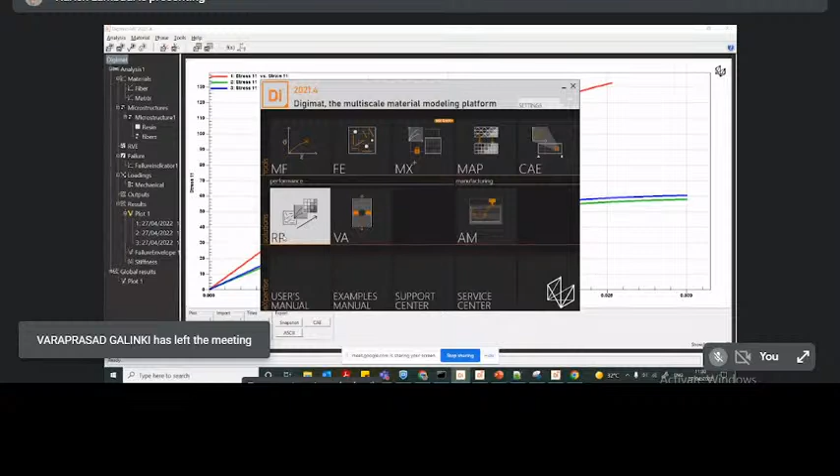So this is how we will create it. When we save this one, it will be saved in the .daf format, and you can use the DAF file in Digimat RP to create a coupled deck for the coupled analysis to run the simulations in your MSC Marc or Nastran or Abaqus. So this is how we create the material cards.

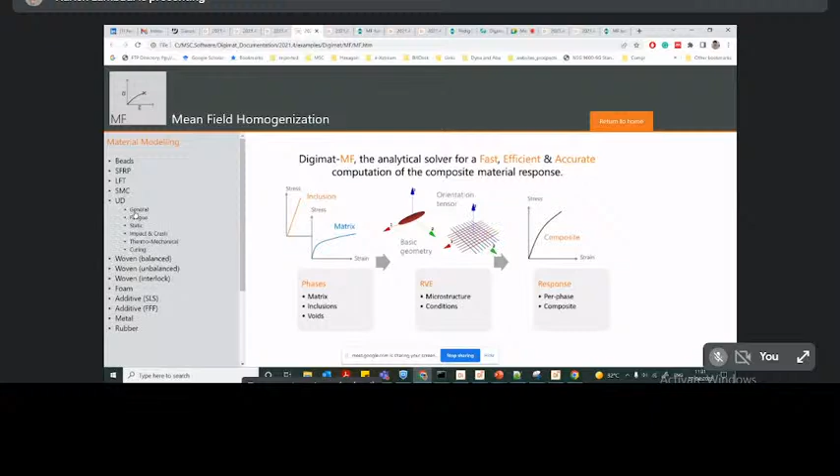This is not only limited to the specific microstructure which I have proposed, but it is possible to create different microstructures like a fabric, a lattice, sheet molding compounds, or for metals. If you have the product with you, or even the student version, you can explore those things using this examples manual, and for each module or each tool, they have different material cards. Let us say for SFRP or UD composites, it has a card like this, and you can explore it.

For the faculty and people doing research, it is also very useful, particularly people working on composites or composite materials or additive manufacturing for polymers or polymer composites. They can use it for advancing the research they are doing. So this is the basic tutorial which I want to explain to you at this moment.

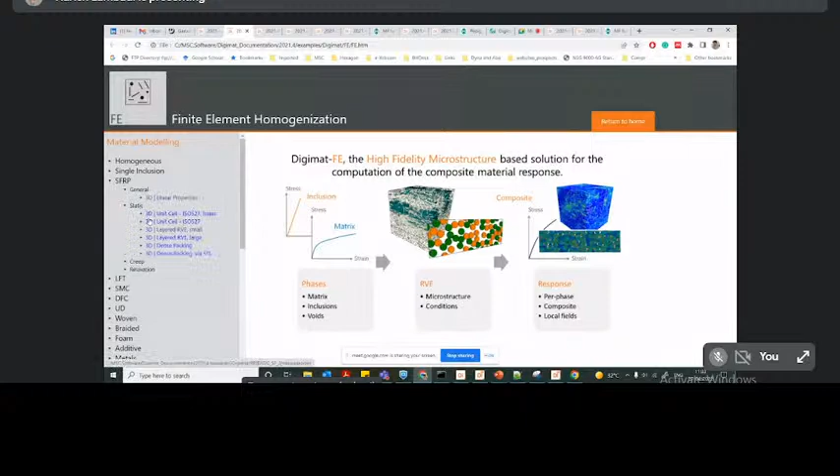The same thing which I have done can be done using Digimat FE as well, but this one is explicitly modeling it in Digimat FE, creating a different microstructure, something like this. Even microstructures which we can't model in Digimat MF can be modeled in Digimat FE, something like these multi-phase microstructures and multi-phase multi-layers. These kinds of things are possible to model in Digimat FE too.

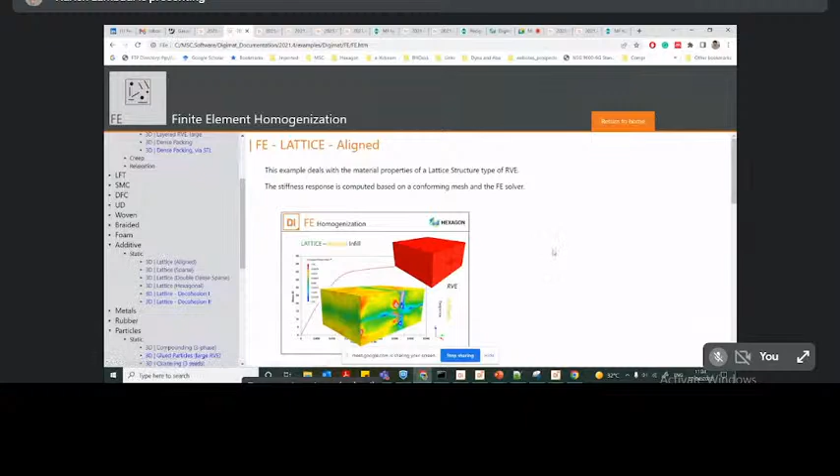And the other tools like Digimat MAP: the objective of Digimat MAP, as explained by Vivek, is transferring the data from one mesh to another mesh. This is a very important tool for industries which have different meshes but want to transfer from one mesh to another. That is possible to do with the Digimat MAP tool.

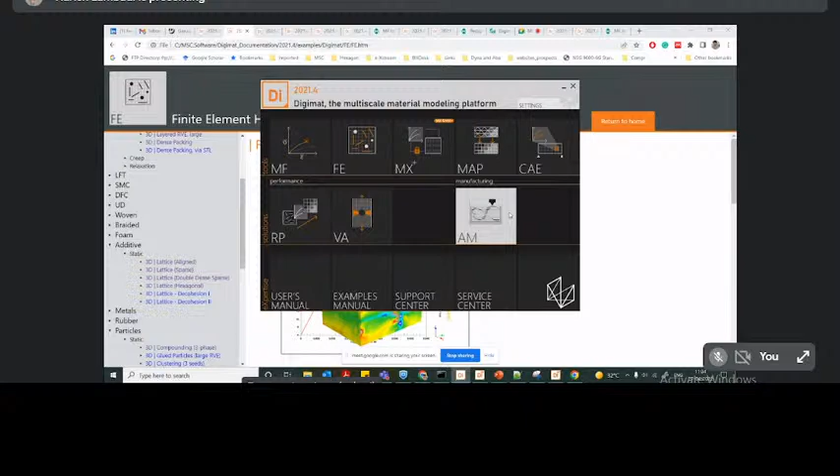And additive manufacturing is the process simulation tool where we try to virtually print in Digimat AM to get the residual stresses, warpage, etc., before you print the part, to understand whether you are getting the real part you want.